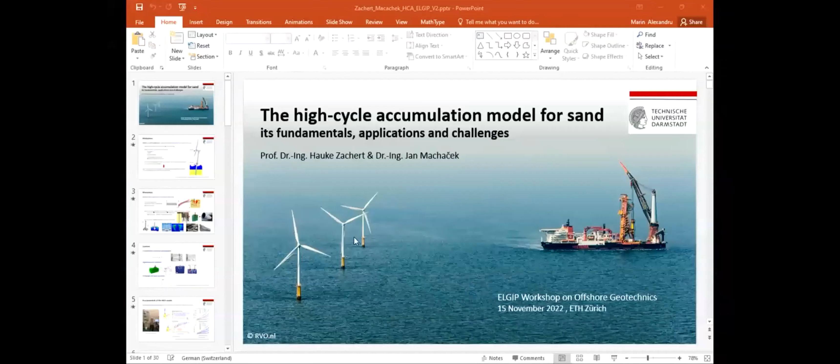And I think, if I understand well, we are moving from modeling to geotechnical characterization. Thank you, Hauke, once more. And I will use one of your figures in lecture tomorrow if I can. I took a photo. Okay.

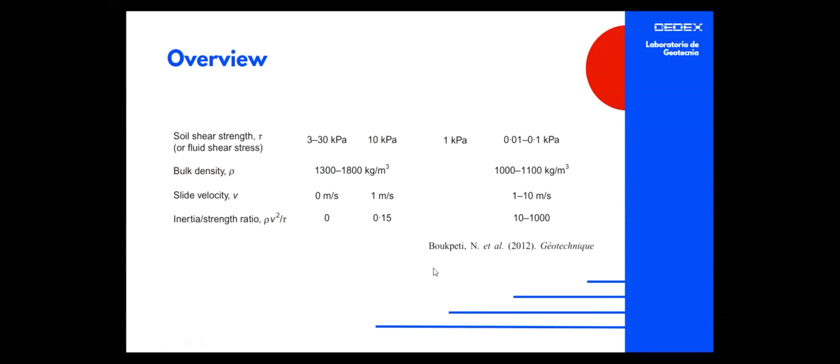Here is part of a table where I try to frame all the kinds of materials we are talking about. We are talking about materials that are almost water, almost all liquid, and the transition between dense mud and soft soil that is more conventional in geotechnics. This material is sometimes close to the liquid limit in water content, and has very, very low shear strength compared with other kinds of soils.

This material is quite related with all these topics we are talking about now, not directly maybe, but all these high infrastructures sometimes involve dealing with this soft soil that we can find in the first meter or so of the sea bottom. Here we can find this when we are dealing with things like pipes or wires in the nearshore environment.

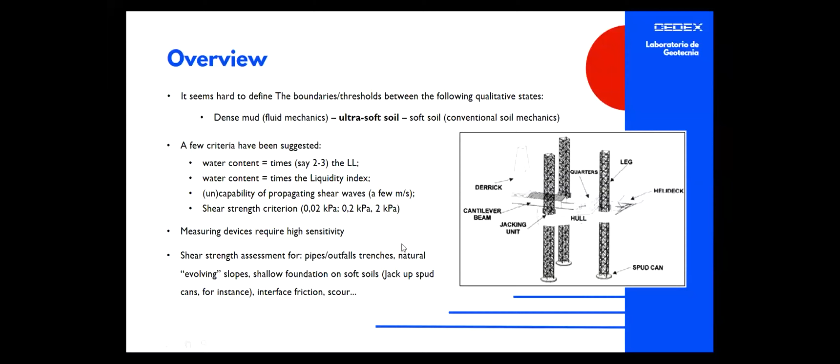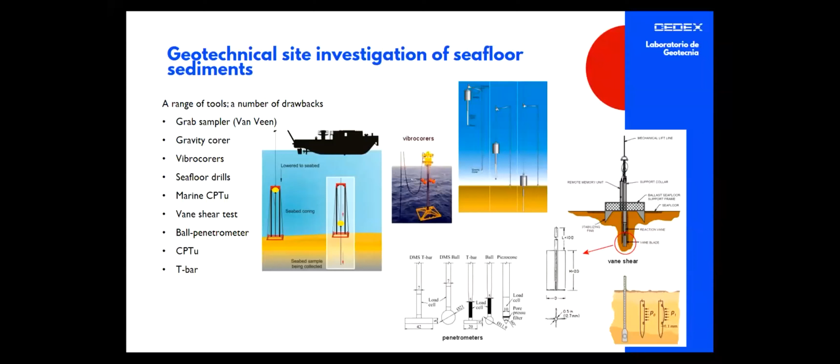Well, this is the different approach that we can use to deal with the geotechnical characterization of these kinds of materials. But none of them are quite adequate to these ultra soft soils. Any sample you collect from this material will not be undisturbed at all, so we can't really use it for lab testing. And some of the common in situ testing we can use, like CPTU, for instance, is a very good technique, but it is not quite reliable in this first meter because of the lack of strength in the material, and for the vertical load it is very, very low.

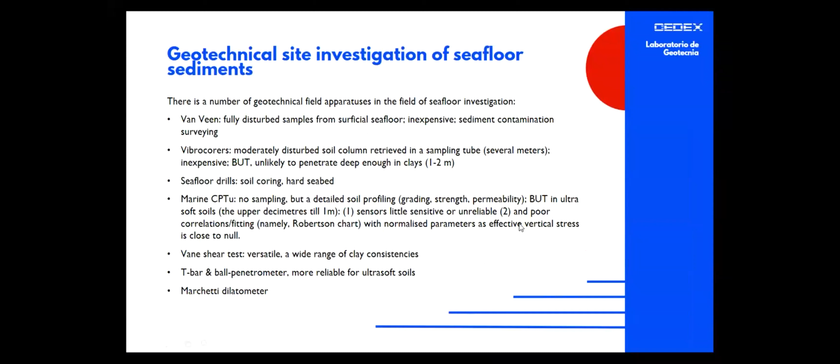So we thought of another way to deal with the characterization of these materials, and we thought of a test that we can perform in the lab, the falling cone. And we thought, why not do this test in situ? We thought we could do a big cone and deal with the problem of buoyancy and other problems we can find in the underwater environment. We developed and tried the use of this equipment to characterize this first meter or so of material.

This has a very strong theoretical background that we can adapt and use for this material. It's very inexpensive. You can build one of these for very low money, and you can do it within the facilities of a port. That is something we have done before, and it can be operated by a diver, like you can see there, or from a vessel if we have deeper waters.

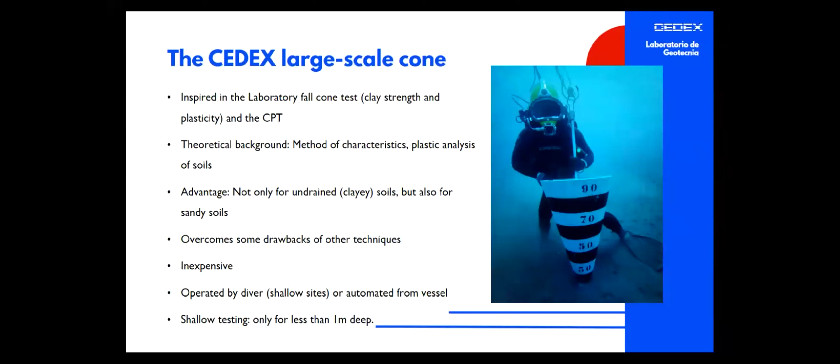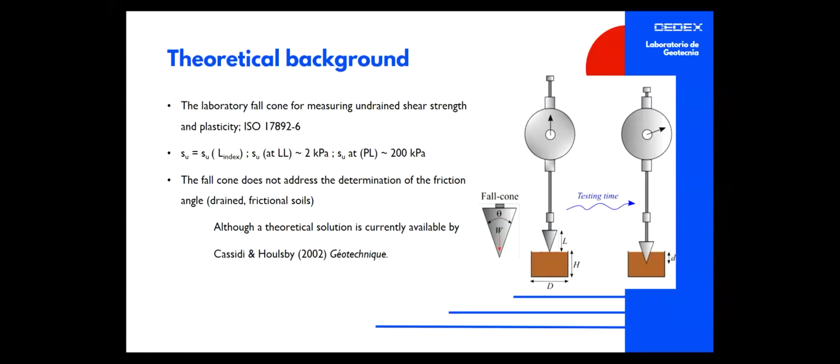Well, this theoretical background you almost certainly know well. It's based on the theory built for the falling cone in the laboratory. Now we have an ISO standard for that, and we simply use this existing theoretical background to address our equipment.

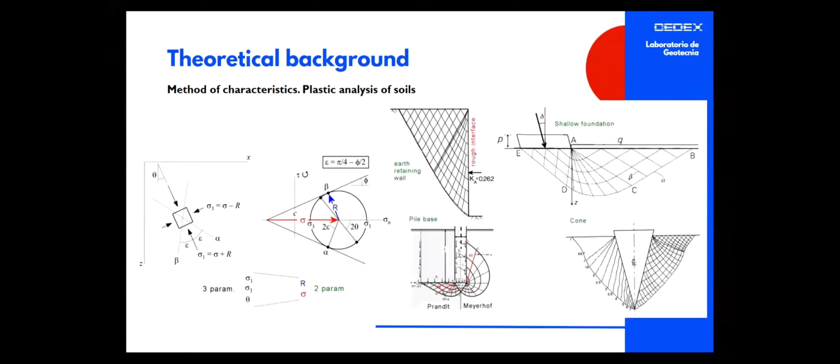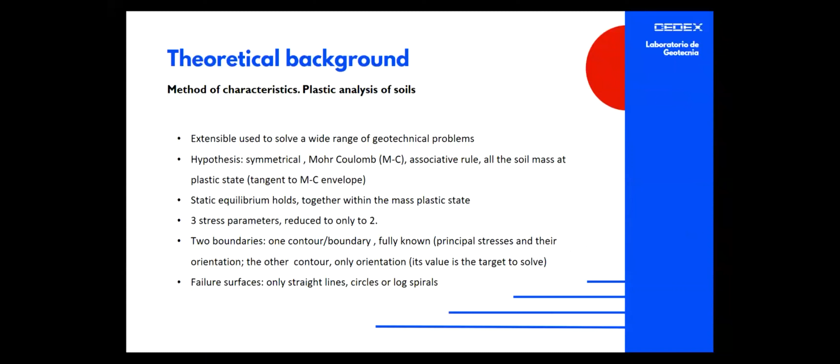The theoretical background is based on the analysis of the plasticity of the soils, using the method of characteristics, as shown here in an example. This is almost the hypothesis of this theoretical background, based on Coulomb with an associative rule, and it can be used both in clay materials and in sand materials. As you can see, I'm going a little quick because I'm not completely sure of what I'm doing in some terms. Sorry.

Well, this is the method, the theoretical background for undrained behavior, solved by Houlsby in the 1980s, and extended for other uses in 2003. And you can see that it's the same method we can use for CPTU.

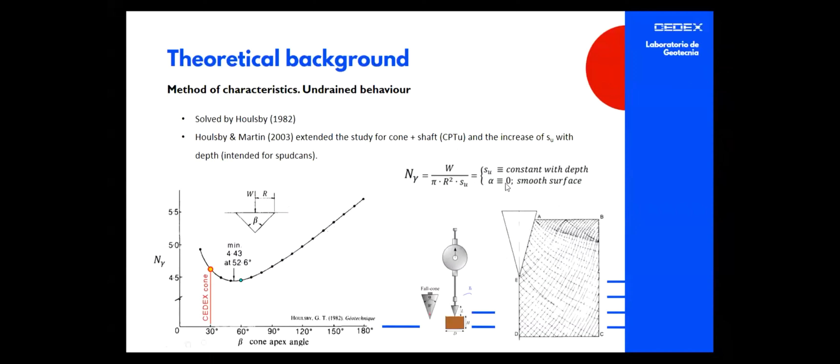Looking for the equilibrium of this cone in a plastic material, we can find this gamma that is related directly with the strength or shear strength of the material. This is more or less according to the dimensions of the cone we used.

This is the parameter N gamma that we have, the constant of the equipment, and easily we can determine the Su, the undrained shear strength of the material, measuring the weight of the cone that we already know. We can change the weight according to the conditions we expect in the material, and according to how deep the cone will reach equilibrium in the soil.

We can work with different laws, or do different approximations on different tests, with different configurations of the test, to check if we are doing correct calculations.

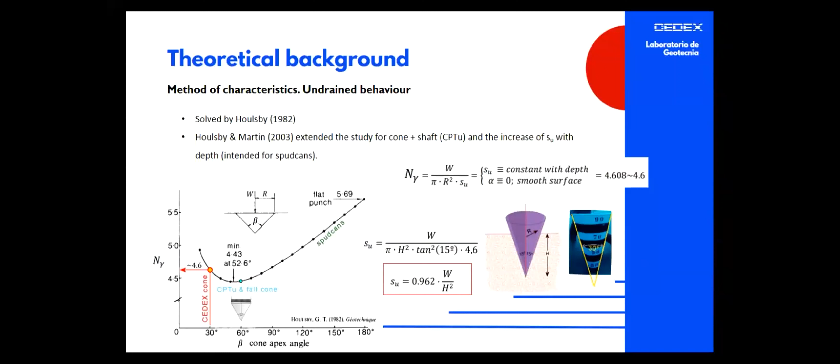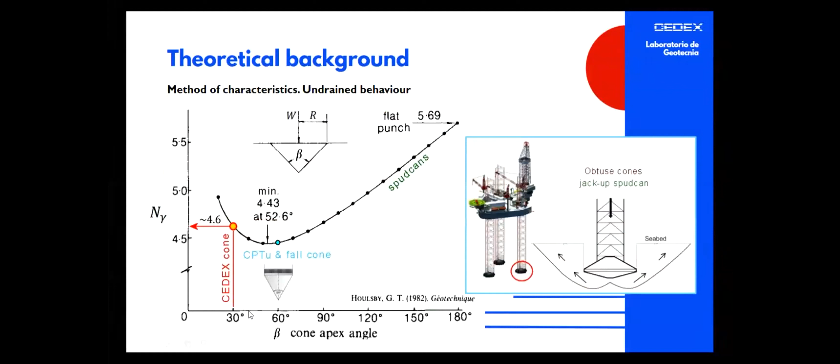Well, this is almost the same. This is related to how we can change the angle of the cone. In our case, we are working with a cone of 30 degrees.

This method is also useful for the study of material in drained behavior, like sandy soils, and the method is almost the same. The theoretical study was done in 2002 by Cassidy and Houlsby, and it's published in Geotechnique. The method is quite similar.

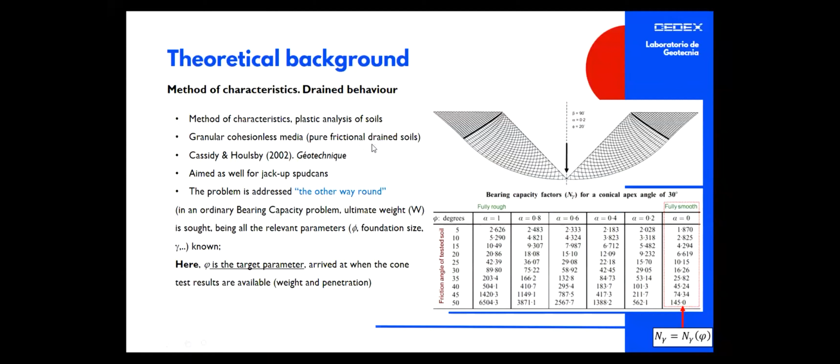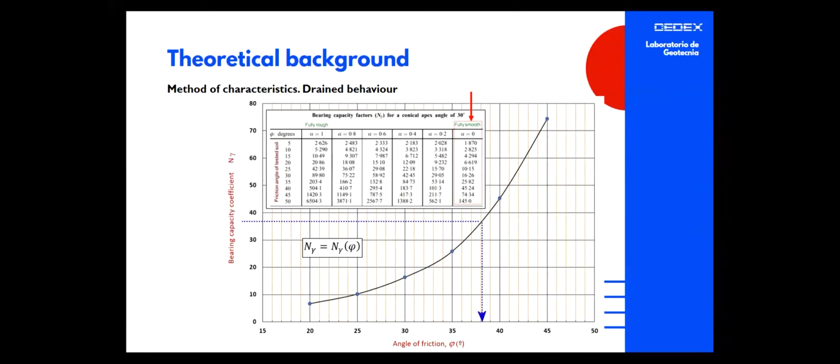We get another parameter, N gamma, that is directly related with the friction angle of the soil. So in the same way we do for undrained behavior on clayey materials, we can get this strength parameter, in this case the friction angle, by studying how deep the cone reaches equilibrium.

This is a simplification of the calculations that we did in our department, for an easy way to calculate this friction angle, with an error of less than 0.5 degrees with this approximation that simplifies the calculus a lot.

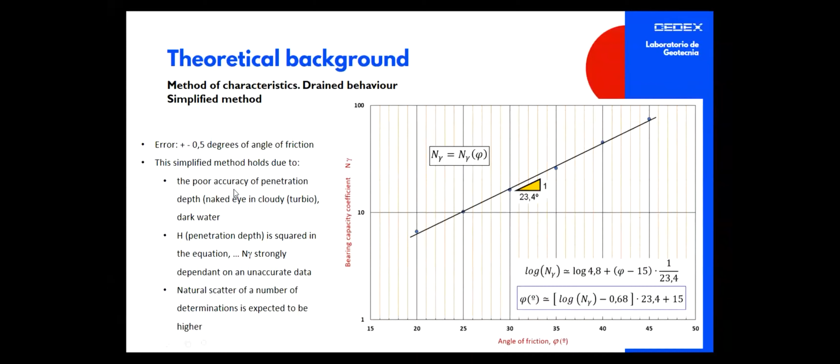As you can see, it's almost the same. This is the detail of how our cone was built. We built 2 prototypes that we already tested and used. It's made of aluminum, almost 1 meter high, and as I said before, 30 degrees of cone angle.

The submerged weight is about 7.5 kilograms, and it's equipped with a buoyancy cell that prevents tilting and helps in the installation of the equipment.

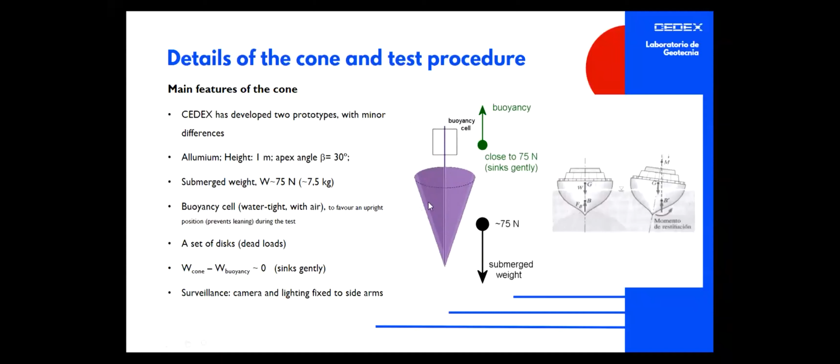We can change the weight that is stored inside the cone, because we can adapt this same equipment to different materials. In case we have more or less strength in the soil we are testing, we can change these loads before putting it underwater, or even at the top.

This is the prototype one that we use in frictional materials. This is the second one. As you can see, 2 different equipment, but almost the same procedure, because it was cheaper to build that in the harbor facilities than to transport it from one place to another. In this case, there was a diver at the bottom of the sea taking the measures.

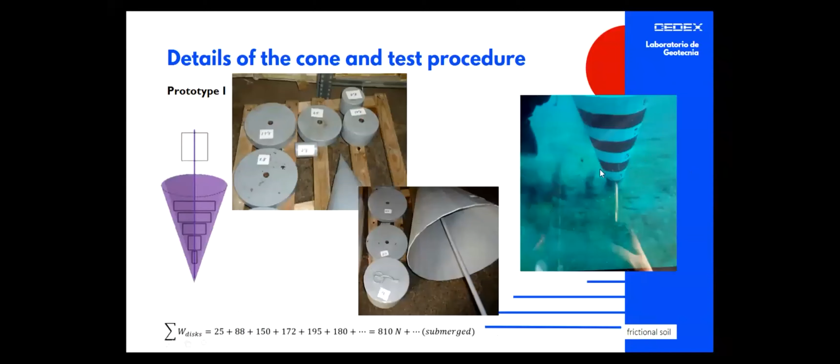We already have these pictures. In this case, it was automated; we performed the test and controlled how deep the cone was by a camera from the surface.

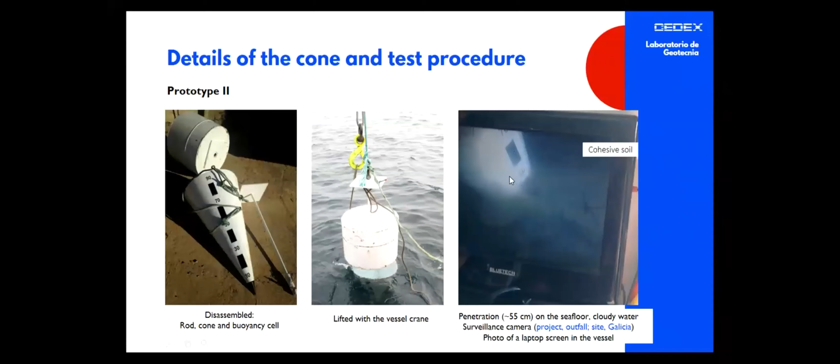Well, the cone was coated with a water-resistant grease to smooth the surface as much as possible and get as close as possible to the theoretical background. As we said, it could be operated from the vessel or handled by a diver, because of its low weight, making it easy to move.

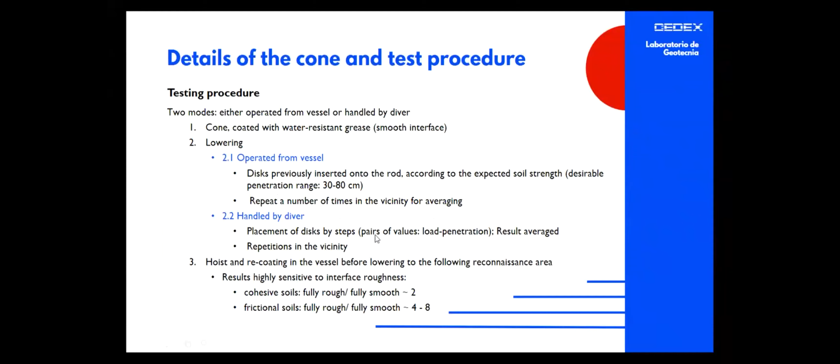This is some tables we performed showing how, according to the weight of the cone and the penetration of the cone, we can get directly the undrained strength of the material, or in the case of drained materials, the friction angle.

As you can see, we can change the weight, so we can perform the test trying to achieve a penetration that is almost in the middle of the cone, to ensure we avoid any problem with the theoretical background.

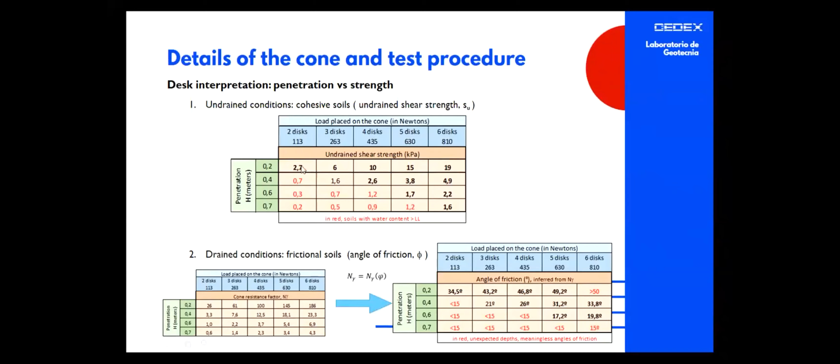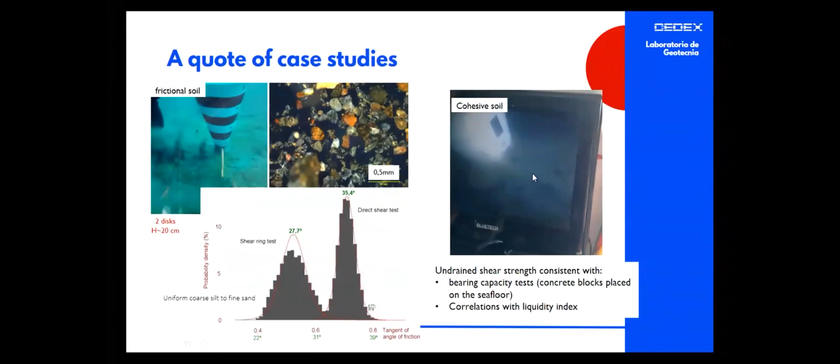This is 2 examples of how we use it. This is from a frictional soil, a volcanic sand that had a very high angle of friction. The other one was using a cohesive soil, a clayey material, in a harbor in the north of Spain.

This is almost everything. We present here a device that is easily used to determine the geotechnical characteristics and resistance of a soil in very soft soil, with a strong theoretical background. So far, it was proved to be fairly in agreement with our laboratory tests and previous data.